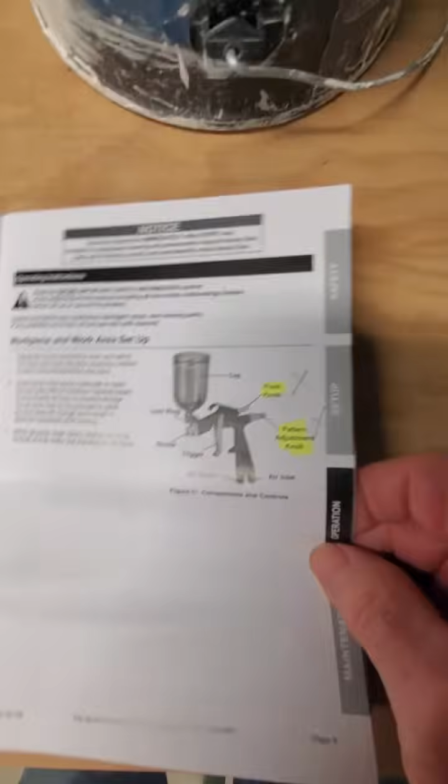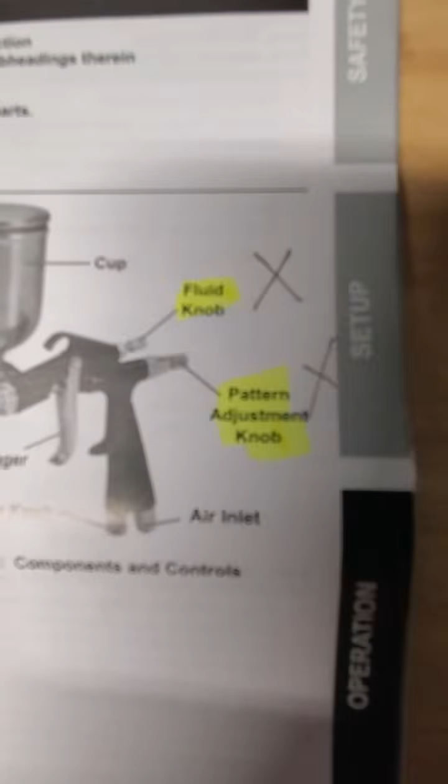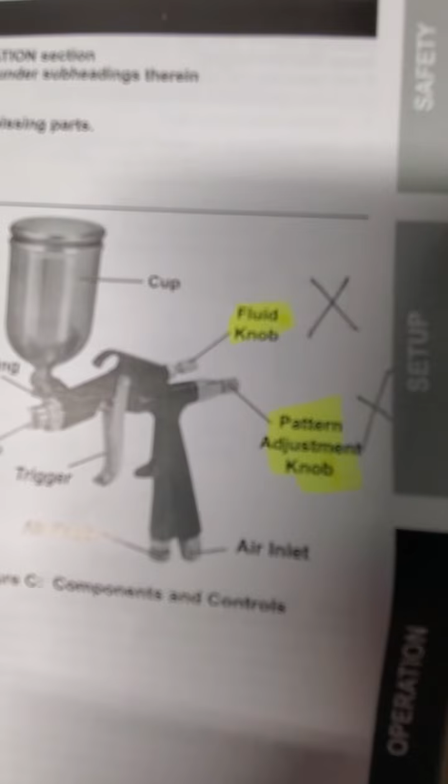Let's start off with why their instructions are wrong. Here's what they're saying. They're saying that the middle adjuster is for the pattern, that means your fan, how wide your spray is going to be or how narrow. You can take it right down to the size of a bottle cap, or you can make it as big as a paint can.

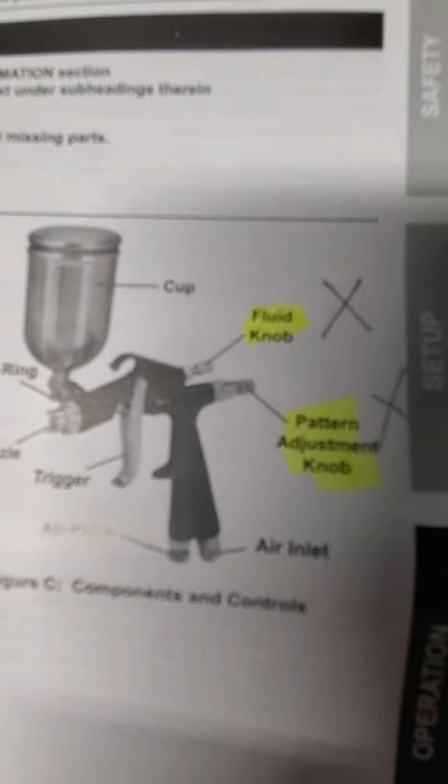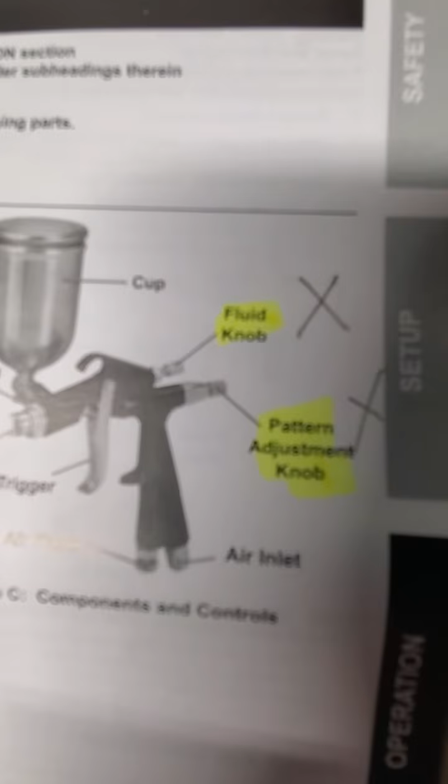And then they're saying their top one is the fluid knob, and the bottom one is the air. They've got that one right, but they've got these two completely mixed up.

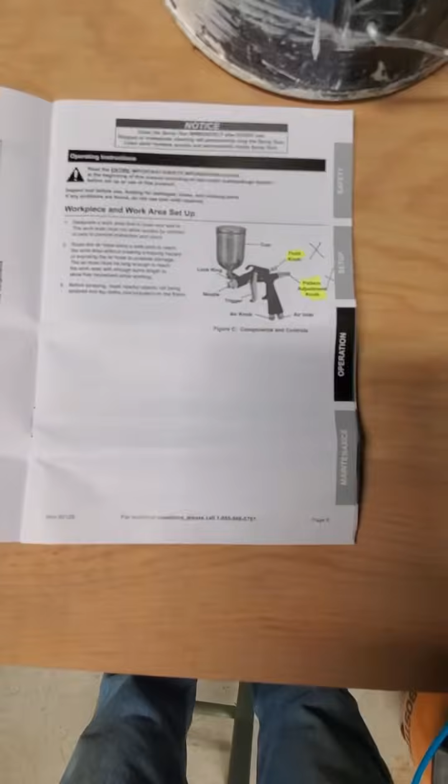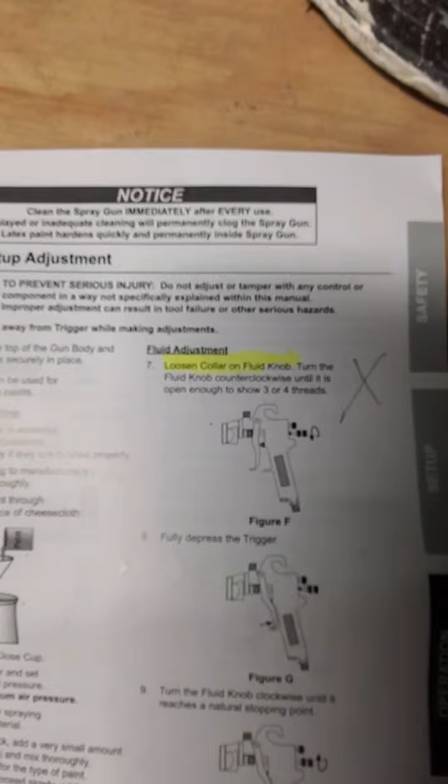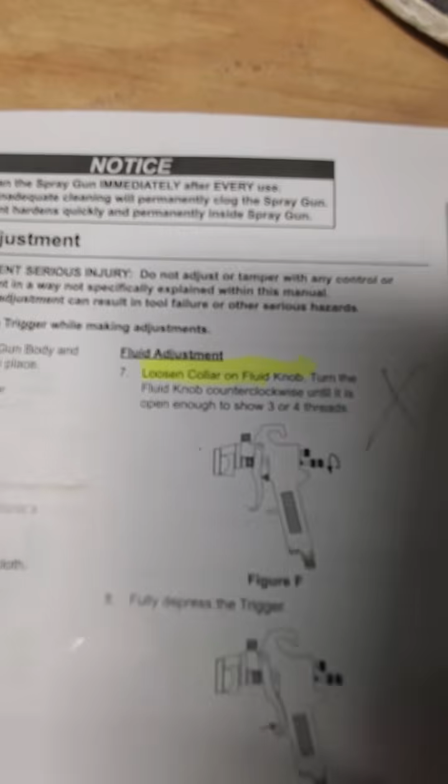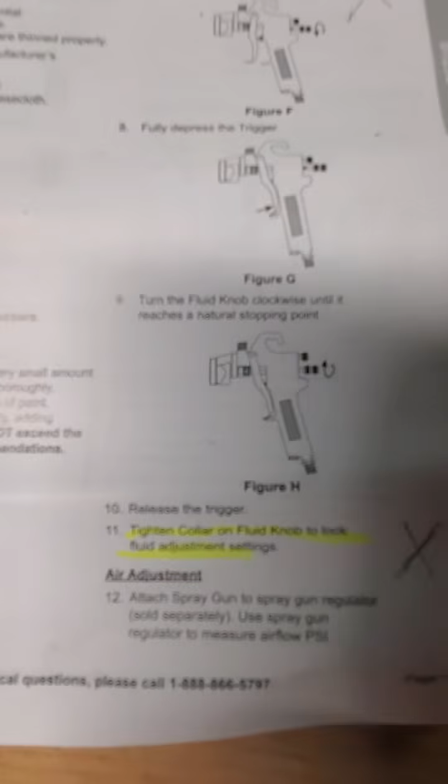Here's their instructions in here. Let's see if I can find it quickly. Okay, so they're talking about their fluid adjustment. Now they're showing the right one, but they're telling you to loosen the collar on it, which is wrong. You do not loosen the collar on it. And then they're telling you to tighten the collar after you've had the fluid knob adjusted. Wrong again. But anyhow, let's get back to this part here where they're telling you the wrong parts.

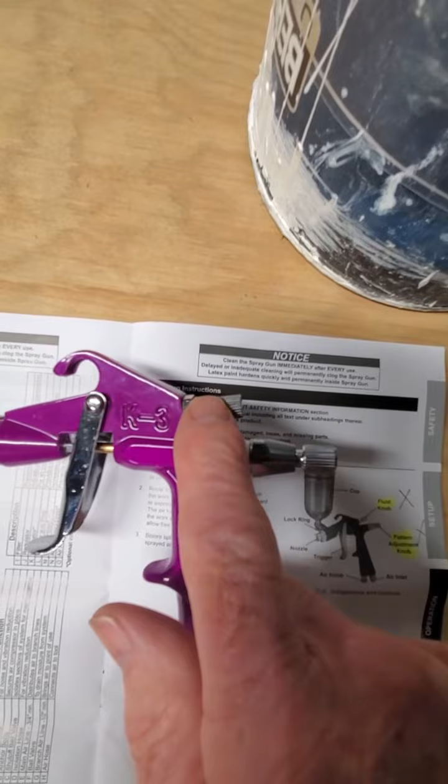To get it straight, this is your fluid knob. This is the amount of paint that's going to be coming out. This is your pattern knob, this is how wide your paint is going to be. And this bottom one is your air knob, your air adjustment. That controls how much air is being put into the gun, and I'll talk about that in a couple minutes. But just remember, that's your fan, that's your fluid, and that's your air.

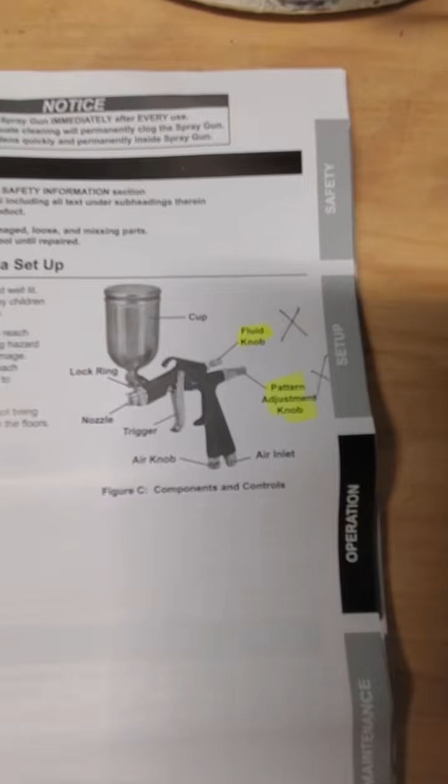And if you follow the directions, you're never going to be able to use this gun. You're going to throw it out and say that it doesn't work. So, first thing they tell you to do is to clean the gun. And with good reason, when you take this gun apart, it is filthy.

Now, they tell you they don't include the tools, but actually they do. They give you this little wrench, and I'll show you what that's for in a minute.

But first thing you do, now I've already loosened all this stuff up, first thing you do is you take off that. Next, with your wrench, you'll loosen this, so you loosen that, and you take this out. Again, this is before you even use the gun, and this is after every time you've used the gun. If you don't use this, your gun's going to get all messed up, and you're never going to be using it.

Next, you loosen this, which is your fluid. This is not your fan, this is your fluid, and for that, a 13 millimeter wrench. Just first of all, unscrew it, unscrew the spring part till it stops, then unscrew that.

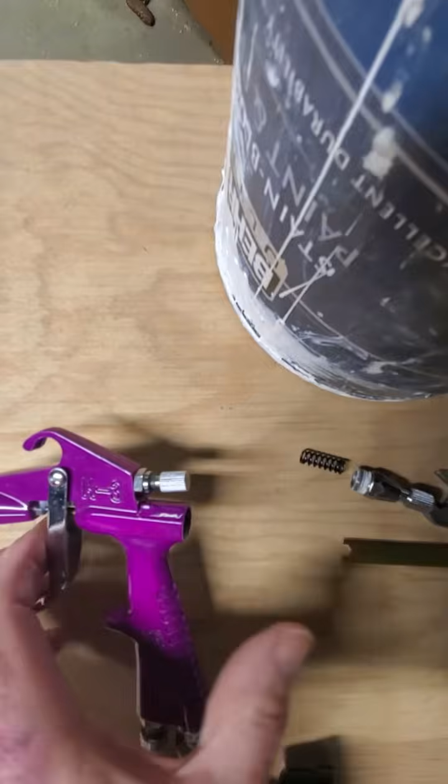Again, I loosened that up already. Now you have a little spring in there, so that's what you're dealing with. Now this is your needle. You have to be very, very careful with this, because if you bend this, the gun is worthless. So in order to get that out, you just use a pair of needle nose pliers.

There you go. Now you take this, you take all this stuff here, and you put it in some soapy water, and you clean it all up. When you're done with it, it'll be wet, so take your compressed air, blow it in there. These things will rust, it's not quality, so it will rust. Blow it in there, turn it over, blow it down in here. What you want to do is get all the water out of it after you've cleaned it. Dry this off with a paper towel, and then you're ready to reassemble it.

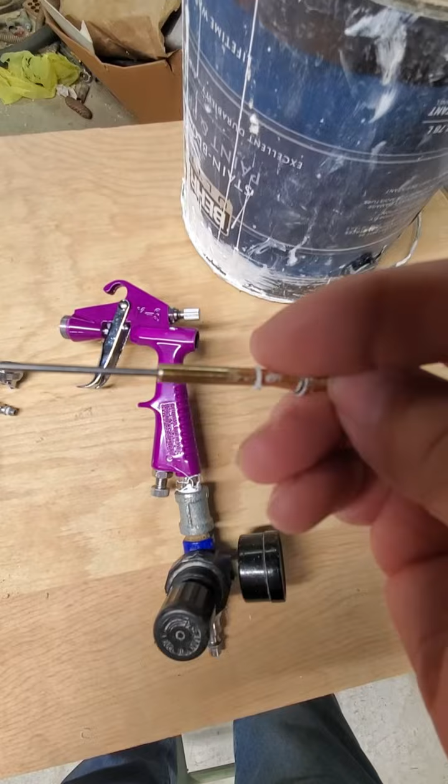Reassemble it, you just take it carefully. Now, another thing you'll notice, there's going to be silicone on this stuff here. If you take that off, it might leak, so I just left it on. You take it carefully, put it back in there where it came from, push it all the way in.

All right, once you get it all the way in, you can put this back together. Now put some sealing tape on there, because otherwise air is going to leak out of it.

And this is what they're telling you to loosen up while you're trying to adjust the knob. You don't loosen this up. You never loosen this up. Once you put this on, you don't take it off to loosen it up.

Anyhow, let me just put my phone down and put this stuff together, and then we'll go on from here.

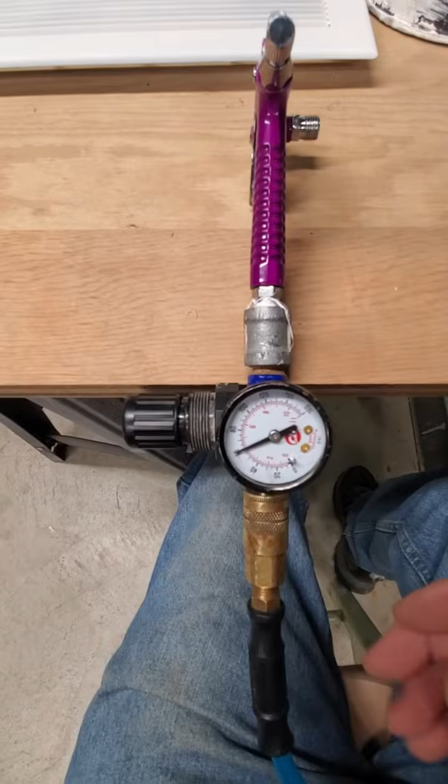All right, so when you're setting the gun up, they say that the maximum pressure should be 50 pounds. These don't come with an air regulator on them. I would recommend you get one. You can set it at your compressor.

Now, you don't want to be doing big things like a car or cabinets or anything like that, but this will work for small things. Matter of fact, this is what I did. This is the registers, and they were all rusty. And as I say, a can of spray paint was going to cost $10, so I just bought the gun, and I can do a lot of registers from now on.

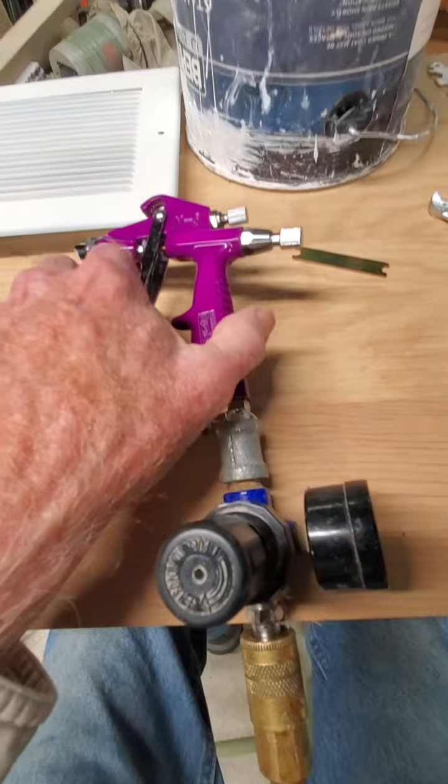All right, but anyhow, when you set the gun up, what you want to do is, first of all, pull the trigger back, open this up all the way. Pull the trigger back, and then start tightening this up till you feel it stop. That's your initial adjustment.

The air adjustment is down here if you don't have a regulator. But if you're working with this, then you have to go back and forth to your compressor, back and forth, to make sure that you have it right.

And it's a lot of hassle. So the more expensive gun, I think it's $32, comes with a regulator.

But you really should have a regulator directly on your gun. But anyhow, when you set your air pressure, notice this is set at 50 pounds now.

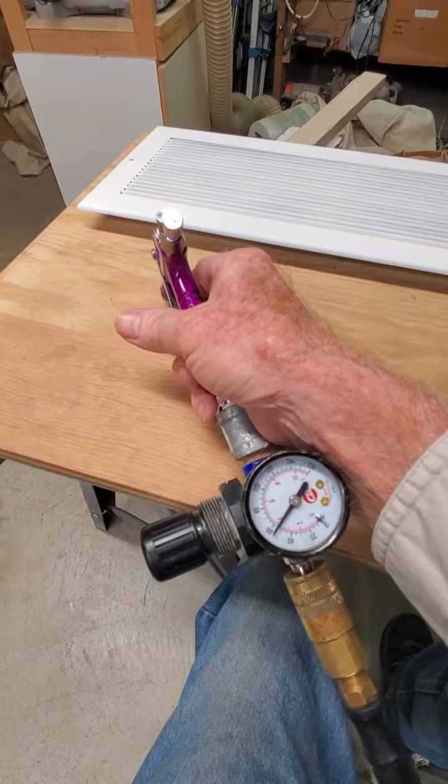However, when I pull the trigger, watch what happens. All right, it's no longer 50 pounds. So what you do is you set your air pressure. You set your air pressure with the trigger pushed.

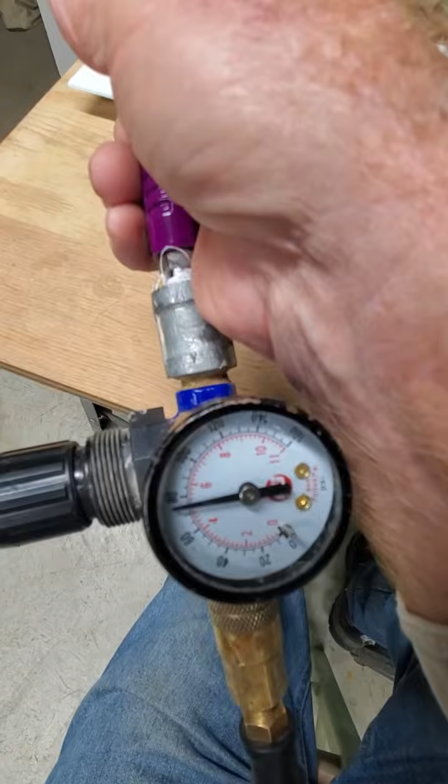Let me set the phone down. And that's way above 50 pounds. However, when I pull the trigger, it's just about 50 pounds. So I haven't really set my air pressure at 50 pounds. I've set it at almost 80 pounds. And then when I pull my trigger, it goes down to the 50 pounds.

So that's why if you don't have your air adjuster on the gun, it makes it kind of hard, because you're always not going to have the compressor right at your side where you can go and adjust it. And if you're dealing with another compressor, a compressor that's a distance away from you, like this.

You would set the pressure in the compressor up maybe another 15, 20 pounds. So instead of setting it at 50 pounds, which is what your gun requires, you would set your compressor at 70 pounds, and then you would adjust the pressure at the gun.

You don't need 120 pounds of pressure coming off your compressor in order to run the gun. Matter of fact, that's not good. So turn the compressor down to the minimum that you need, and then adjust your gun.

Now, if you don't have the separate thing on your gun, that's when you would turn this. And that does the same thing as your adjuster would on your gun, your air regulator. But when you turn this, if you turn it up, you're going to have less air. If you turn it down, you're going to have more air. So if you're using an air regulator on your gun, then keep this wide open.

So I think that covers everything. You can use latex to get this quality. You can use latex paint. I think I reduced this 10%. So I don't know, 3 ounces, I think, was a teaspoon of water.

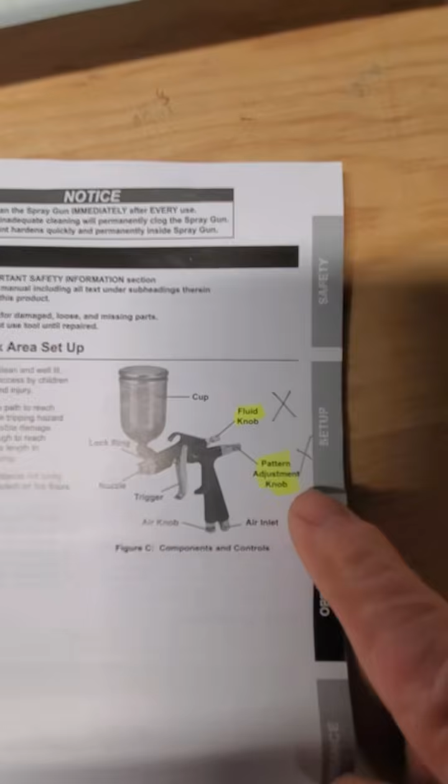But that's it. Again, this one here is not your pattern. The top one is your pattern. And where it says fluid, that's not your fluid. That's actually your pattern.

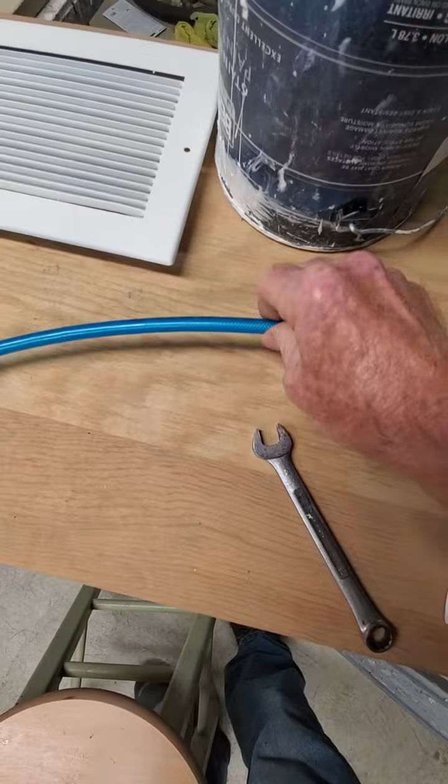Okay, one thing I forgot to say, if you are using one of these small pancake compressors, these are 1/4 inch hoses, and you're better off if you get a 3/8 inch hose. You get them in Harbor Freight for like $15, $18, something like that. But a 3/8 inch hose will put more air out, and you'll be better off. This is okay for little nail guns and things like that, but if you're continually using it like you will be with a spray gun, I would get the bigger hose.